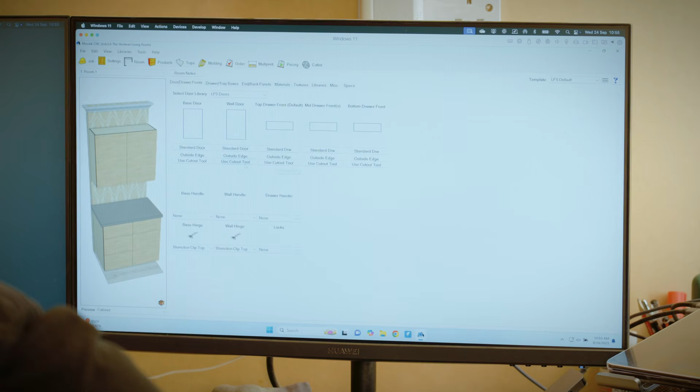So how would you normally start your job then in Mozaik? Would you go through and set your settings up? Do you use the template? How does it work on a day-to-day for you? Yeah, so generally the way we do it is we'll download the site survey drawings. I'll then bring up a new file, then go into the settings first. I'll make sure all my door templates are correct, the hinges we'll be using on the project are correct, go through and make sure all the drawers are correct. If there's any trays, I'll select the right trays. And then I'll make sure that the materials are correct for each job as well.

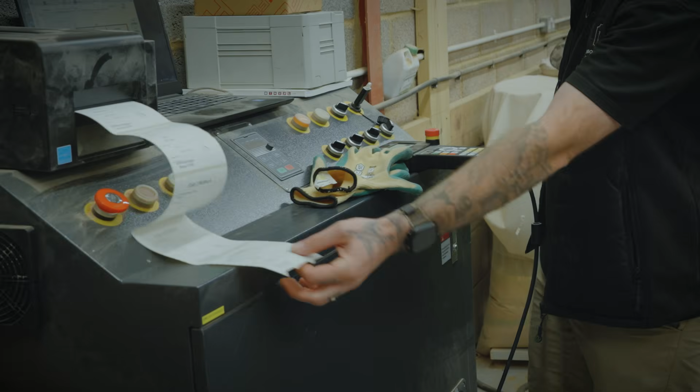So we've got the cabinet labels for the full built cabinets, or do you just do it for the CNC labels? Basically the way our labels are set out is that it has each individual part name on it, what room it's going to be going onto. It will have a picture of the individual item itself that will indicate edge banding for us. It will tell us what material it is. It also tells us what sheet that particular part was on, which is really good because sometimes when we've fully cut a whole program out and then we notice that there's, say, a piece that's damaged or has been scratched, I can then go onto that label, check what sheet it was on, go back onto the software, and then find that exact part on what sheet it's on. Okay, brilliant. So it makes it super easy.

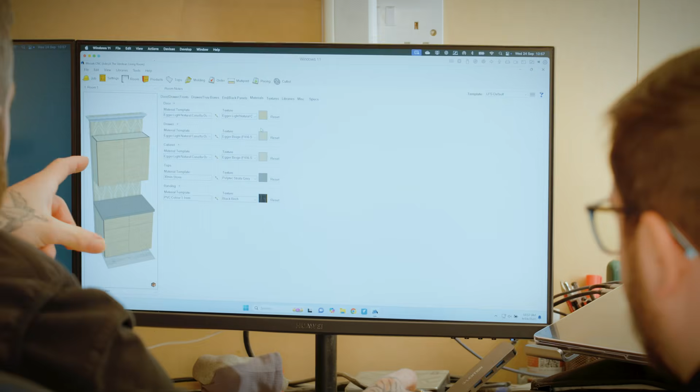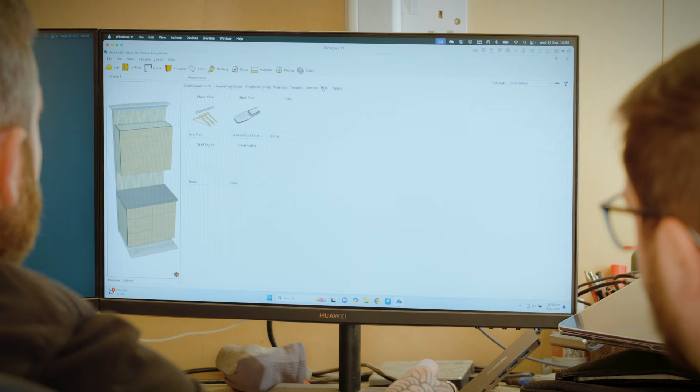Yeah, so what we do is we make sure that all of our materials are correct for the job. The library's been preset, so I don't really need to worry about that. The only time I would ever change this might be that our plinth is set to 100mm, but then on another project it might be 80mm or it might be 50. And then I just specify what shelf pins, what rods it's going to have, because we use different types of rods, and whether it's having legs. We generally don't use legs.

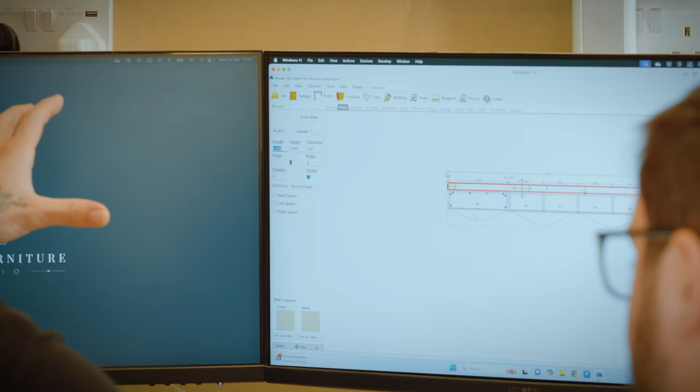Yeah, so I'll then go to the room tab. This is where I'll have my site survey up on the left screen, and I'll then go in and put in all of my wall measurements first. This is really the most crucial point of everything, because if this is wrong, it means everything else is wrong. It's just making sure that we've accounted for floor build-ups, walls that are slightly wonky, everything that has to be thought about before we even put our first carcass in, basically.

So once the room's set up, the heights are correct, the width's correct, that's when I guess we move on to the good stuff and we can start putting products in.

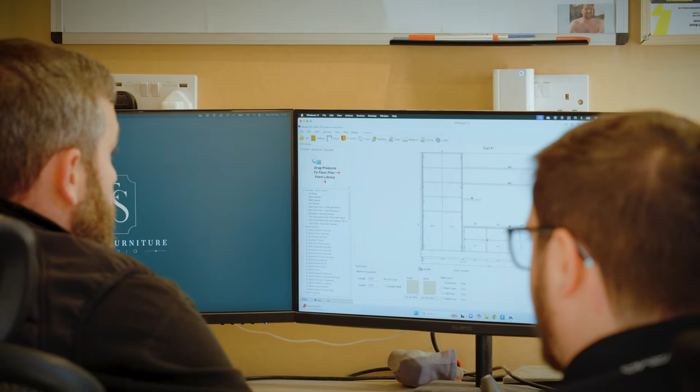So with your products then in your library that you've got there, do you have standard products that you would bring in and then modify, or is everything built each time brand new? No, most things are standardized. So basically what we would do is we would go in to each of these base cabinets, tall cabinets, and we would change the specifications in the settings so that every time we drop in that carcass it's always the same. Ideally, what works so well is that when the unit comes in, there's just only slight modifications we have to make before it's ready to be sent down to the CNC.

Brilliant. So you drag in your products, you modify them to make them just bespoke to your own customer, and then where does it go from there? Do you then go straight down to the CNC? Do you create drawings for the workshop? So essentially what we do is once we've gotten it to the point that we're happy that this can be sent down to the CNC to be put into production, we can then import this into SketchUp, which allows us just to put some of the finishing touches on. We just kind of clean it up for the visualization of it so that we can send it to the client. Once that's been approved from the client, we then load it up into the cut list, and then we do all of the CNC data ready to go down to the CNC.

Okay, so we've come in, we've designed our job, and we've got all our drawings ready. Where do you go from here then? So yeah, once the project's ready to go, I'll then go onto the cut list tab, which is going to then bring up all of the parts for the project. I can then push optimize, which is then going to bring up the CNC optimizer, which I'll then have a quick look over, make sure everything's looking correct.

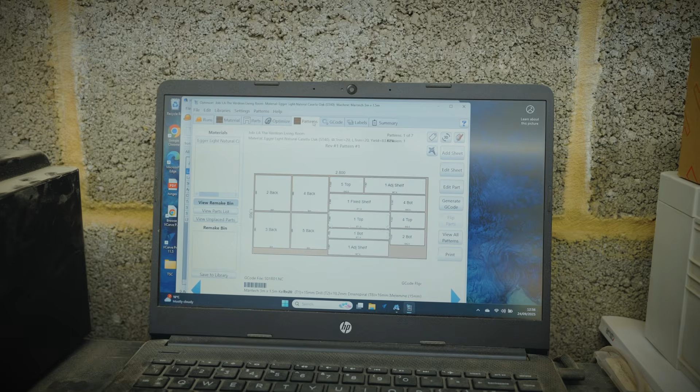I'll then send it down to the laptop that we've got downstairs on the CNC, and then whoever's cutting out that job can then bring that up, have a look at all of the parts, and then they've got access to the labels as well, which they can then print off. Okay, brilliant. So can we take a look at that now? Let's go. Let's go.

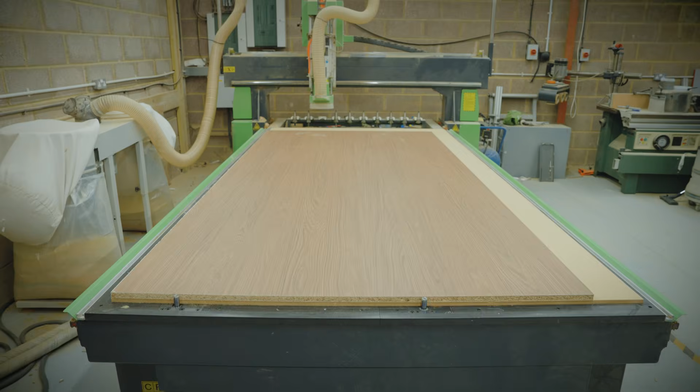Right, so once it comes from upstairs, what we do is we then open the Mozaik software on the computer. This will then allow us to open the optimizer, which is going to bring up all the information of how many sheets, labels and things like that. So what we do is we click on view, go on optimizer.

So this is talking directly with the one that you've got upstairs. Yes. And so it's all done via the cloud, just to make it super easy. So if there's any changes made, all of the computers are all synced up. Okay. So then what we do is we open up the job that we were just on.

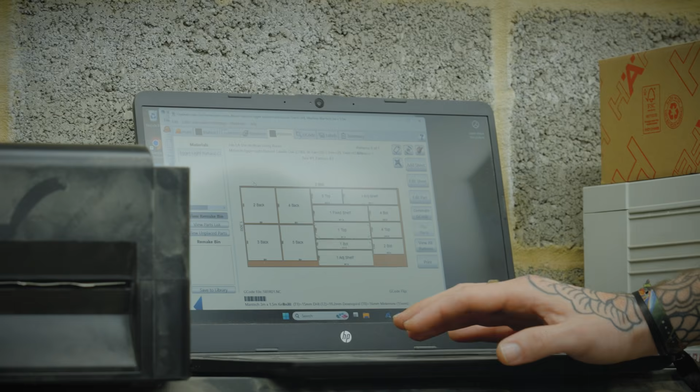This is then going to bring up all the information, like all the patterns that we're going to be cutting out. You can click onto each individual pattern to see what parts we're cutting. Generally, when we're at this stage, I'll just keep it on the labels. And then when we're ready to print the labels, I'll just click one button and then it will print.

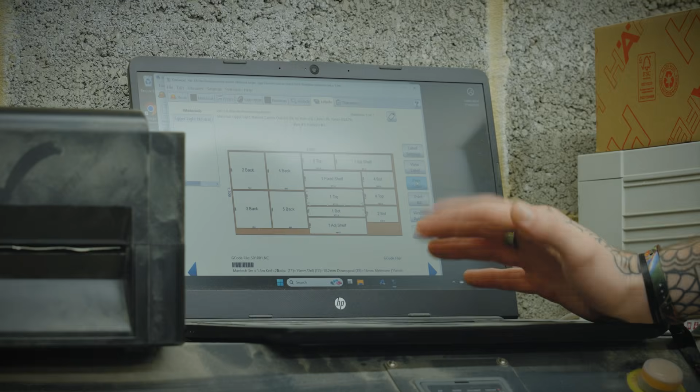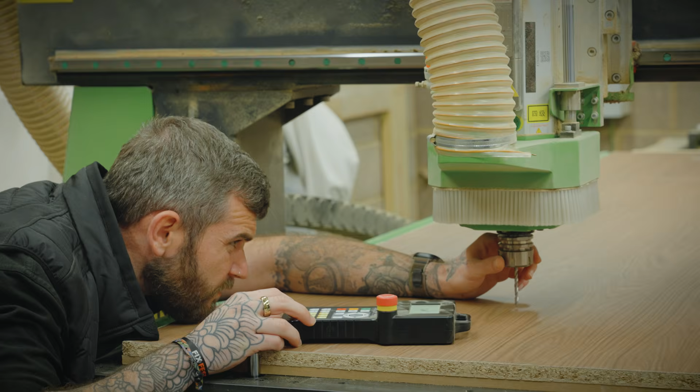But yeah, once we're at this stage, the next thing we do is CNC is ready to go. I just need to Z it to the thickness of the material, because sometimes they're all slightly different. And then once we've Z'd it, I'll show you how we load it up and then we're all good to go. Brilliant. So the next stage is I load it into the CNC.

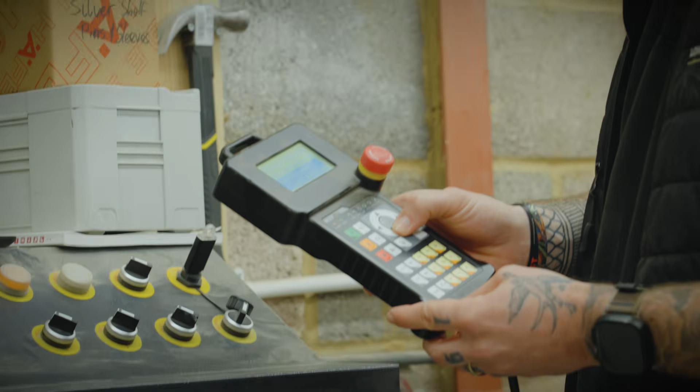So it's all been put onto the cloud. I then put the memory stick into the computer. I put the files onto the stick, which then goes into the CNC. All I do is I go onto USB files, current jobs, find the job that we're working on. There's the material that we're using. And then S01, R01 is sheet 1, run 1.

Okay, so that's got multiple sheets loaded in ready for you to run through. The only time this would change is if you've made any changes. It might come up as R02 or R03, but generally, if everything goes well, it should just say S01, R01. Brilliant. And then literally push OK. That's now ready to go.

Okay, and then would you print your labels now? Yep, I print my labels now so they're ready to go, so that once the CNC machine's finished, I'm ready to just put them onto the material. Okay, fantastic. So what I'll do is I'll print them off quickly. So what we do is we click print all.

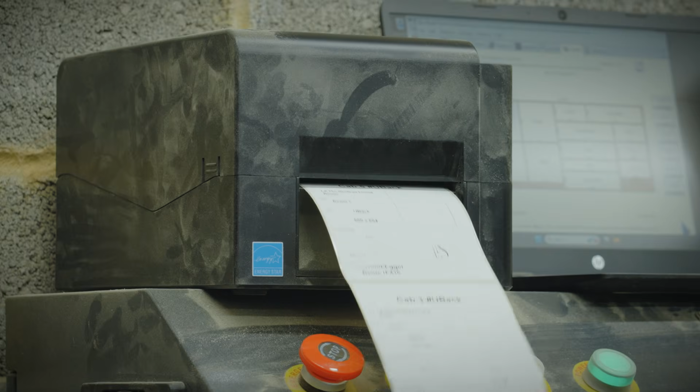Yep. So it goes green once it's printed all the labels, and then as you can see, all of our labels have the material on it, the size of it, tells us where there's edge banding, obviously the name of the job and the part. Okay. So it's all there on one sticker, ready to go on.

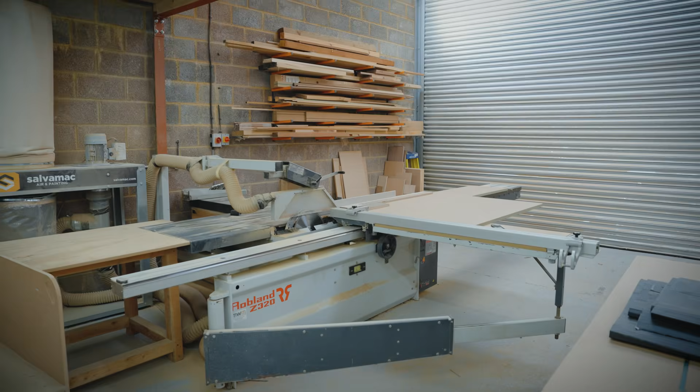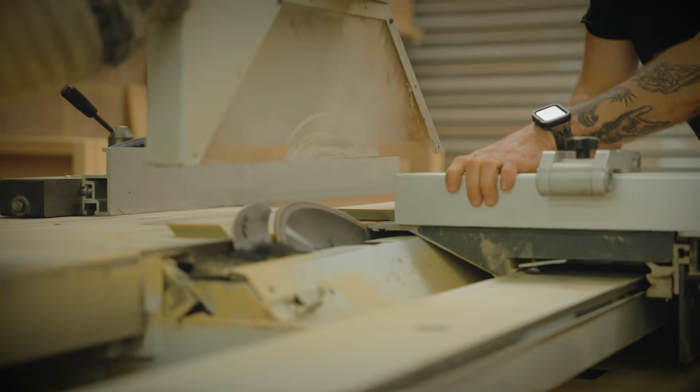So obviously you've got more than just the CNC, then what else would you use? So we'll use the panel saw when we deem pieces on the CNC to be too small, or like miter cuts and stuff like that. So if we run through a job, do our cut list, and there's little bits that might go flying on the CNC machine, we'll cut them manually on the panel saw, especially miter cuts as well. You just get them nice and clean, perfect how you want them to be.

What would you say the most efficient bit of Mozaik is that has progressed your workflow? Yeah, so I would say the biggest time saver for us is the way that we're now able to construct carcasses. So previously we used to manually do all of the holes, countersunk holes, and then we'd have to pre-drill to construct the carcass. But now we don't have to do any of that.

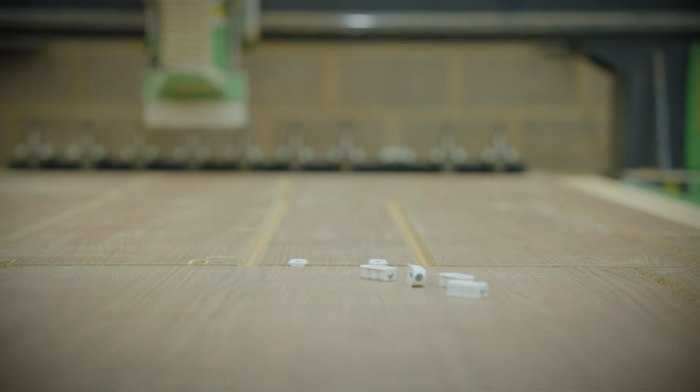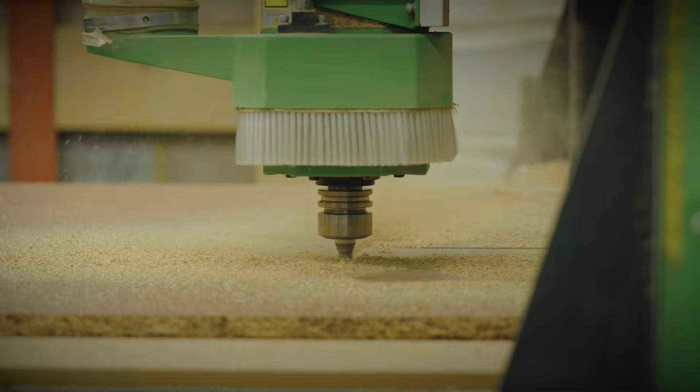So we can now use whatever fixings are your preferred choice. There's a massive library of different fixings that you're able to use. We use the Lamello Cabineo just as our preference, because we find it a lot quicker on site for constructing. But the main time savers are fixings like hinge holes, plates, adjustable shelves. It's all done on the CNC, so we don't have to do any of that manually anymore.

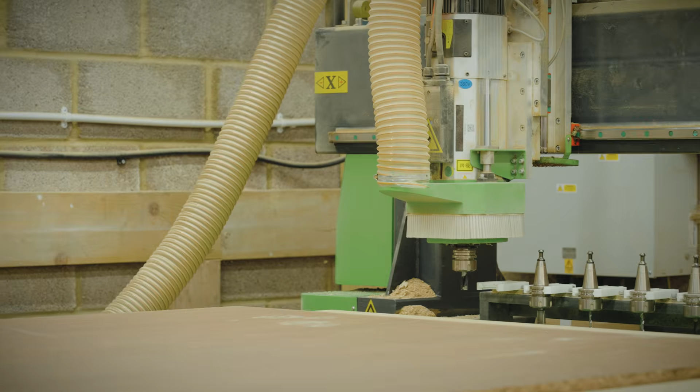And I think the biggest thing for me as well is that, doing it before, we were accurate, but only accurate so far. Yeah. Whereas because it's coming from the CNC and it's spot on, it means that I've got the confidence that when I put that door onto that carcass, it's going to fit and it's going to be correct, unless I've done something wrong.

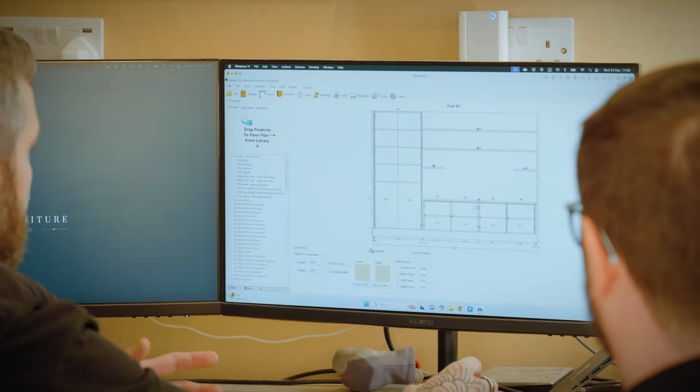So I think another one of the main features that I really like about using the software is that obviously not everything's 2D. Having that 3D visualization is a really big thing for spotting errors as well. And it's really simple. All you do is click one button and then it will give you the 3D representation of the units that you're constructing.

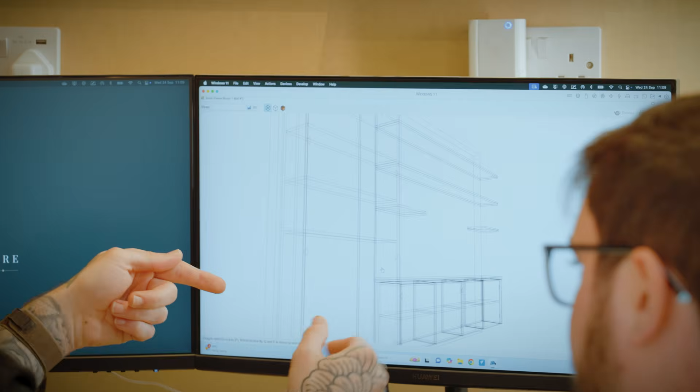For instance, say we've got some internal drawers here. I like to use the 3D view because you can change it to the wireframe, so then I can come in and make sure that the depth of my drawers is correct. If we've got hinges on, as you can see it's indicated with hinges here, if I've got drawers there and I haven't double checked and pushed those drawers back, it might interfere with the hinges.

You don't want any collisions. It's just little things like that we like to check before we send it downstairs, because check twice, cut once. Exactly.